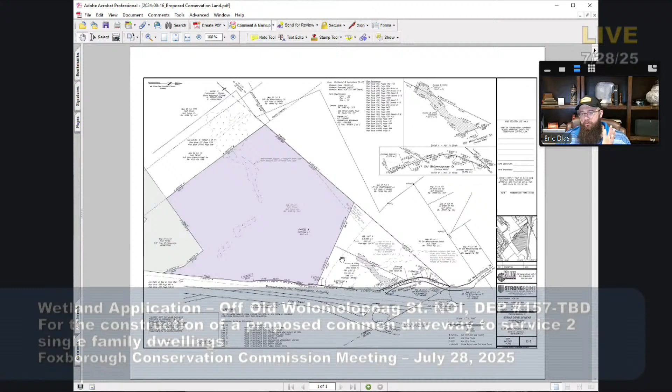The property is about 43 acres in total, bounded by the Foxborough-Sharon town line to the north, the railroad to the south, and Old Wolomolopoag Street, an unimproved way, to the east. There is a subdivision plan in place with the town of Foxborough to develop and improve Old Wolomolopoag Street, as is an agreement with the town of Sharon. The street itself is outside of the wetland resource areas, so that's not a subject of this particular NOI.

What we discussed informally last time is that the plan was to take the total 43 acres and create lot 1, lot 2, and then parcel A in the rear, which is about 32 acres—actually 32.15—and that's the parcel shaded in purple. We'll come back to that in a minute.

So on the site, I'll zoom in on lots 1 and 2. There's a bordering vegetated wetland that spans all of lot 1 and extends a bit into lot 2, and a small intermittent stream that flows out of the wetland toward the railroad track. We discussed that the area on the east side of the resource areas is not conducive to siting homes and septic systems in particular—there's a lot of rock and ledge, it's low-lying, and we don't have the soils needed to site septic systems.

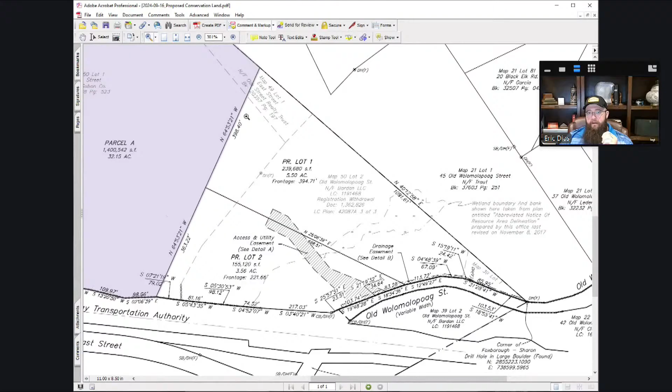So the plan is to cross the resource area at its smallest point, which is the stream, and gain access to the buildable area of proposed lot 1 and lot 2 on the west side of those resource areas. Obviously, the stream crossing requires a waiver from your bylaw, specifically the 25-foot no-disturb zone, and we'll get into the design of the crossing. But the other thing discussed at the time, as mitigation for the proposed crossing...

...was that 32-acre parcel A in the rear. It abuts land owned by the town of Foxborough Conservation Commission on the south side, highlighted in green. So the intention is for the owners to deed this parcel A to the town as mitigation for the proposed crossing and a betterment for the waiver request being requested.

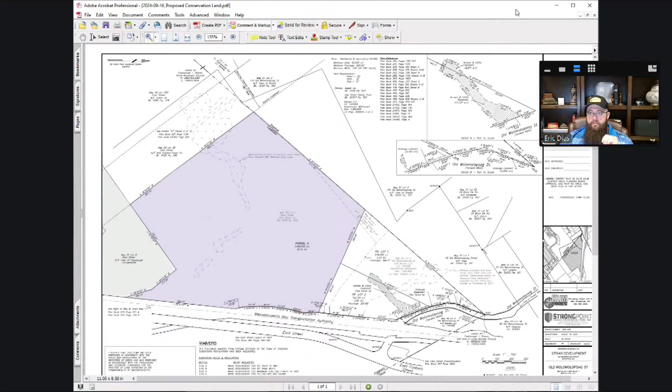So if we go to the notice of intent plan, we can get into some more of the specifics. This is the plan itself that we propose. I'm going to zoom in on the plan view a little bit.

This is Old Wolomolopoag Street shown in its improved form, and this is the proposed crossing we're bringing in. We've kept it to the bare minimum we can. We're proposing an 18-foot wide bituminous driveway, which gives us adequate room for 2 cars to pass, one coming in and one going out, because it will be shared between the 2 lots.

The alternative to sharing this driveway is to do 2 separate driveways, which you can see indicated by this dashed line, showing where a second driveway might have been proposed at the thinnest point of the bordering vegetated wetland. Obviously, that would result in more wetland disturbance, more buffer zone disturbance, and a second waiver being needed, et cetera. So we felt that was not ideal, and we even went as far as already securing the special permit needed for the common driveway with the planning board.

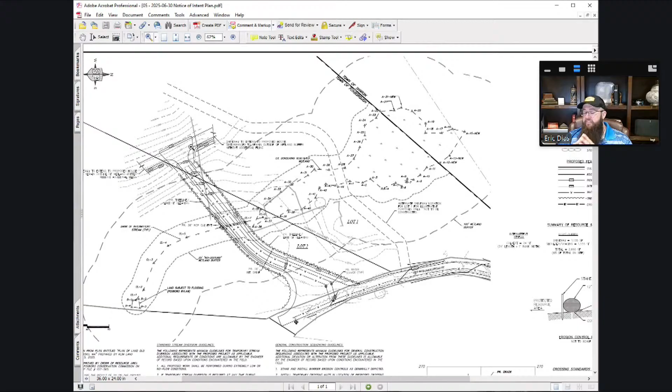The plan right now shows the driveway coming completely out of the 100-foot buffer and then taking a T shape to each lot. The houses are not included in this plan. This land will be sold, and it's intended that the houses will be located outside of the 100-foot buffer, which is why they're not included in this filing. But there is notation on this plan specifically stating that if any further disturbance is ever proposed within the buffer zone, it is required to come back for another filing. That would happen separately, down the road, by another applicant.

The intention now is to gain access, and the proposal to do that, if I zoom in, is to span this stream with a 36-inch culvert. I do have some photos that I'll share in just a moment. The stream in this location is about 1.5 feet wide and about 3 inches deep. I was out there in May when the stream was flowing, and I have photos of that I'll share.

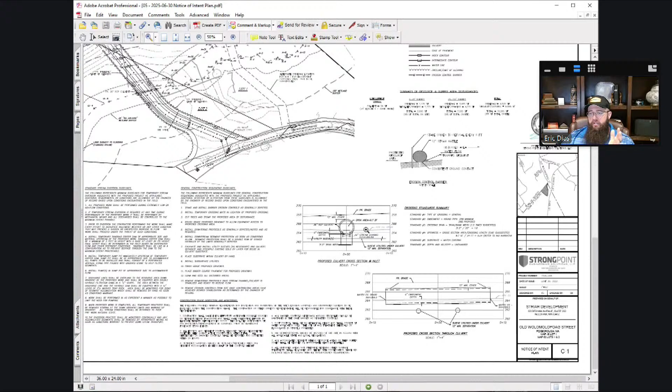So what we've proposed for the crossing is a 36-inch culvert, and we have details here with a breakdown of how it addresses the stream crossing standards. From an embedment perspective in crossing span, we exceed the requirement. For the standard substrate, we're going to match the existing substrate, so that pipe will have any topsoil removed during installation reintroduced. In terms of depth and velocity, the span is such and the grade is not changing, so the depth and velocity of the stream will remain unchanged.

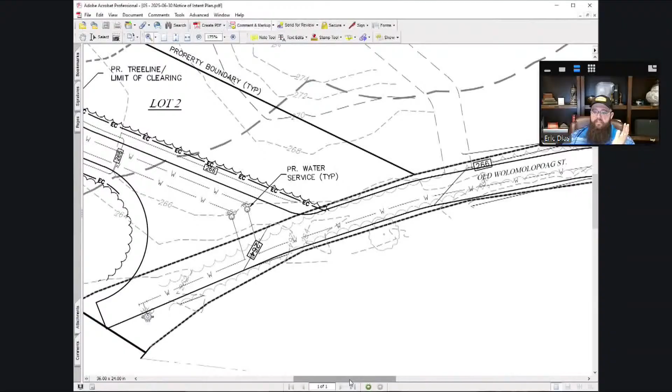The only portion of the crossing standards we're not meeting fully is the openness. The suggested openness ratio is 0.82. To achieve that, we would need a 30 square foot crossing in this location, which, if you do the math, means 6 feet wide and 5 feet tall. That's about a full-scale bridge in this case, which would certainly be a cast open bottom culvert with footings, et cetera, and it's frankly overkill in this location. Beyond being overkill, it would result in more disturbance within the buffer zones, which is why we shied away from that. I don't believe it's the intent of the crossing standards to require such an extravagant crossing that would create a bunch more disturbance in the buffer zone for a stream that looks like this.

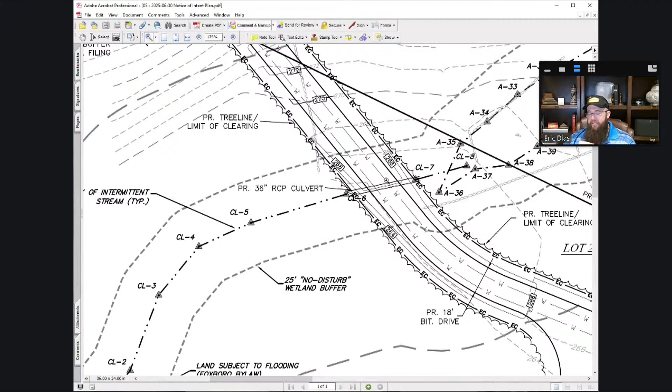Let me stop this share and start another one so I can share some of the photos that I took while we were out there. Just give me a second to bring these up. Okay, so if I go back to sharing, that should be coming up in just a second.

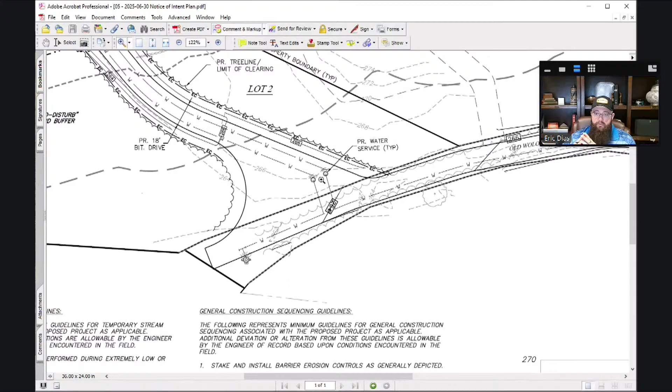One thing, you might want to put a cul-de-sac at the end of the T, just for fire emergencies, so they can get the trucks in and turn around. I think that's a Foxborough requirement, to have a cul-de-sac rather than a straight T.

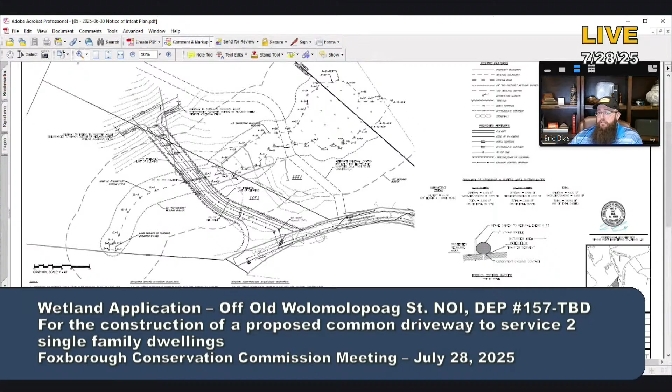Sure, that's definitely something we can address. Even if it was a cul-de-sac or a T, the intention is that the area where the pavement widens would remain outside of the 100-foot buffer zone. Yeah, but it's one of the requirements we usually get from the fire department, so the trucks can get in and out without unnecessary backing. Oh, that's fair, thank you.

Does anybody else have any questions or comments?

If we get this land, how do we get to it? Well, it abuts some we already have, so that's right here. This electric company owns this, Mass Electric. This is Sharon Conservation, this is Foxborough Conservation.

But we can't come in this way. He did go over, I feel we talked about access when he brought it in the first time with the informal discussion. I don't remember exactly what the access was.

I can pull up a map that shows the whole thing if you give me just a second. You would access this parcel, the purple one, through the green one. But I can pull up a map that would show the limits of the green one so we can determine where that access is if you give me just a second.

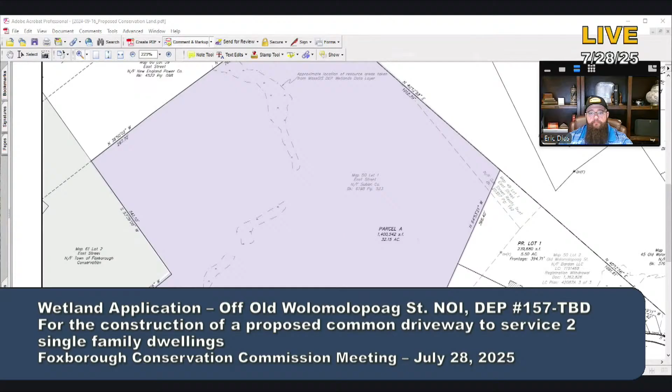Because either you access through here, if you can find that green space on that street, or you come down the power lines.

Okay, so I'm going to stop this share and I want to share another.

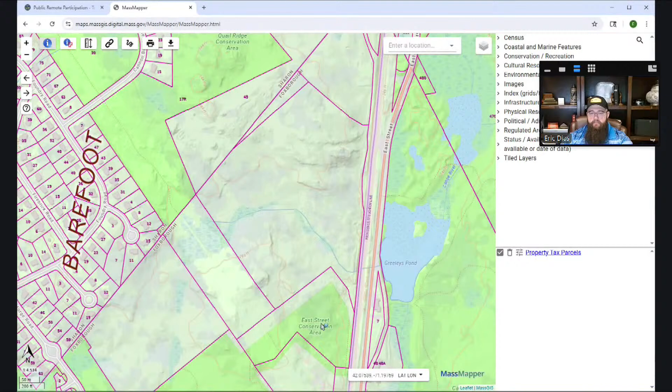So if you can see, this is Mass Mapper. This is the property through here. This is the power line easement, and this is the East Street conservation area that is shaded in green on the plan we just looked at. That connects to the Cannon Forge Estates conservation restriction. So I believe what we talked about last time is that East Street is currently accessed through Cannon Forge, and this would be accessed through East Street. It would really just be an extension of that.

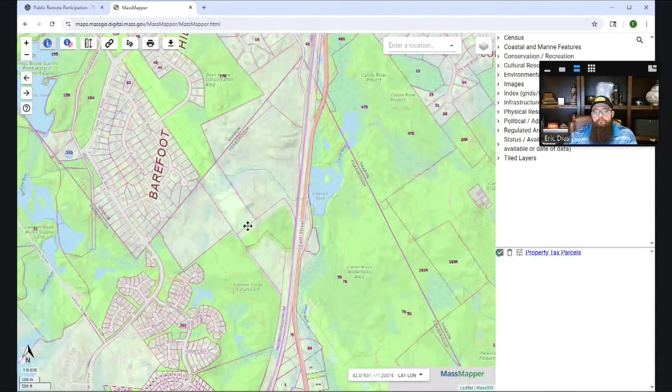Okay, all right. Yep, because I know where the accesses are through Cannon Forge in that area. Walked up many times, yeah. So, all right, thank you.

Do we have developed paths? And then do we have paths, trails? I'm not sure, I've never walked that area. I'm not sure how many trails. I know there's some in the Cannon Forge area, but I'm not sure in this other line.

And we could come down through the power lines from the Sharon Road up there. So it might be a little wet. No, there's a road that goes right there, there's a service road that runs right through here.

Any other questions, comments? Just one question. According to your notice of intent, the flagging was all done in 2017, and I remember we went out there to take a look at it. The question is, has anybody gone out there to confirm if that has expanded or not expanded from the information we put on here?

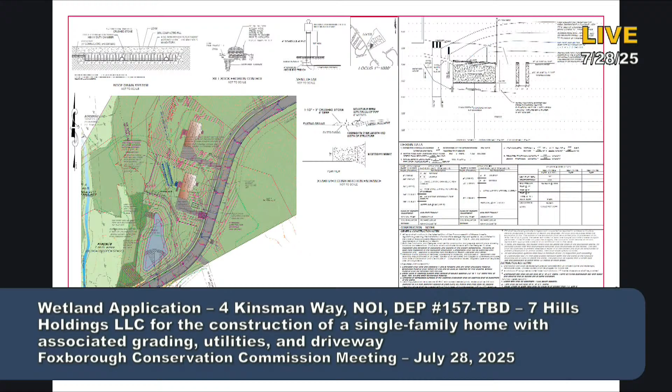Lot 2, the first one on the left, also has some activity in the buffer zone. Starting over here on Lot 2, going down, you can see the red line in this case. Let me zoom in to make it easier for us to look at this. That's much better.

Here's the 100-foot buffer zone line. It goes through and out—this is the buffer zone, as I talked about earlier, from the BVW. For Lot 2, which contains the pond as well as the house, we've kept the septic system outside of it, and it's going to be a fast system, a nitrogen reduction system. This is not a zone 2 in Foxborough, but because it's within 150 feet, the local bylaw requires a nitrogen reduction system. Since it's past 100 feet but less than 150, that's what we have here.

Instead of grading out, what we're trying to do is limit the amount of grading. So we've placed walls along the edge, and we've put the house as close to the roadway as possible. The minimum setback in Foxborough from a street is 35 feet; we've set this house at 36, so we really can't go much further forward than that.

If you look at Lot 4, the next lot over, there's no activity within the 100-foot buffer zone. All of the alteration is in the riverfront area, but there's no buffer zone setback, and in that case the septic system is well outside the 150-foot setback.

On Lot 4, the closest activity is 150 feet from the river—that's the grading in the backyard. For Lot 2, we're 131 feet from the river; the closest activity is 44 feet from the BVW because of this corner here, where we're within 50 feet.

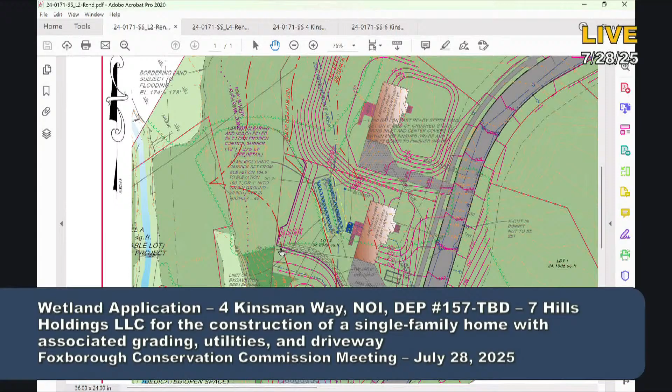The buildings will be served by municipal water. We don't know yet if it will be gas or propane—it's 99% likely to be propane because it's so hard to work with the gas company nowadays that a lot of developers have chosen the propane route. It will be underground, well outside the buffer zone and outside the riverfront area.

So I think I'll stop right there and see if you have any questions.

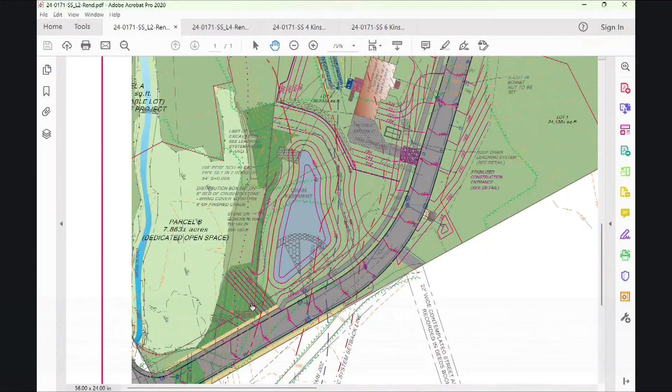Any other questions? So, Bill, this doesn't have anything to do with the two lots, but looking at the catch basins, it seems like a good third, maybe half, of a couple catch basins are not in the road. Is that going to hurt the water getting into the stormwater? That one on the left is a double basin with the grates, but a good portion is not in the roadway - just to capture the water instead of everything going down to the end.

Did you notice there was a lip, a curb? Did you notice Baker put a curb in there? For example, a bad example, Lawson Farms - you know how that hill washed out like crazy? Because what was happening is the roadway is crowned, so water hits the crown and just goes. That's what curbing is for, to get the water into the catch basin. There was no lip there, and it wasn't built up on the edge - sometimes we build it up on the edge. So it just eroded. Baker, learning from that, put in a lip along the edge there, so that will act as curbing to get it into the basin.

There's a tendency not to loam it and seed it and stuff like that until near the end, right? Right, yes. Will that slope be stabilized just with a grass mix, or will there be something more substantial?

It's not really lawn if it's that steep, right? It's all going to be lawn. Everything we're going to do there is lawn. And they might put some landscaping in there, but it's going to be lawn probably.

And these are not custom homes, right now these are just contractor homes. So I might be coming back and say, oh, this guy wants a pool, this guy wants to do this, there's a modification. But as we sit here today, that's the plans. They're going to build these speculative houses in these locations. But it would definitely just be grass.

Is it possible to stake out the location of the trailhead, the piece of land that's going out to the conservation land, up at the cul-de-sac? Yeah.

This is center line entrance? Center line entrance of it? Yeah, sure, sure.

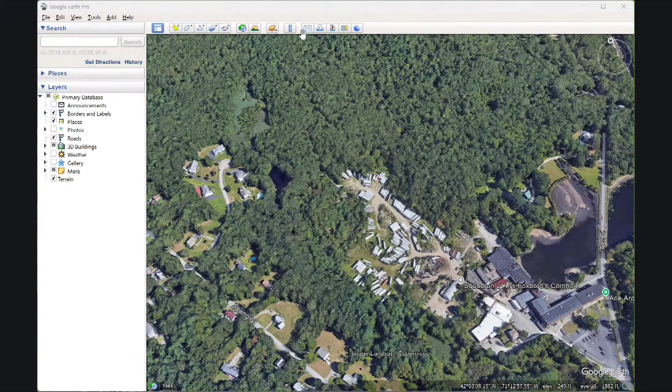So this is the latest one. What year is this? Probably 2025. A bunch of the trailers have been removed. Let's go back a little bit.

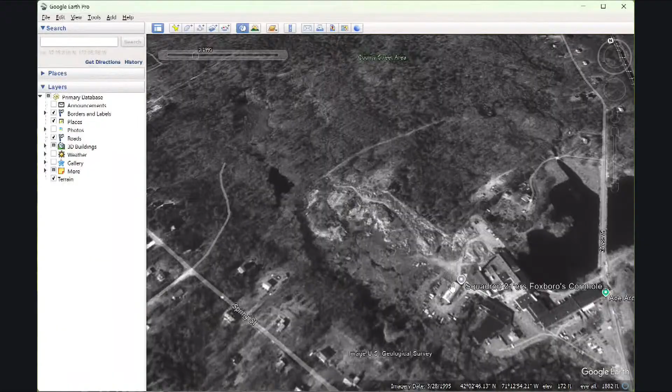If you could just bear with me, I think it's pretty interesting. So here's 95... going to 85, image quality was usually terrible back then. This is the first decent picture, so you can see how the site was gravelled out. This is 20 years after a lot of it was gravelled out, and as we move forward, this is 2001-ish.

This is about when I started getting involved. You can see that all of these trailers were moved in here, and this is an isolated wetland out here, you see it. This is obviously a spring picture; this is a December picture, so it's even worse. This is definitely a wetland out here, and you can see how it goes along the edge. During high water seasons, there's water that actually runs through there.

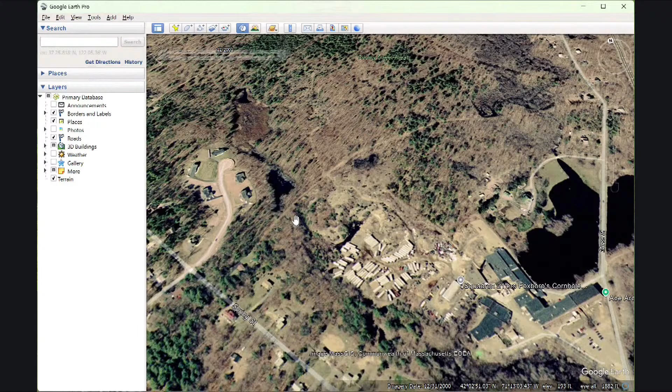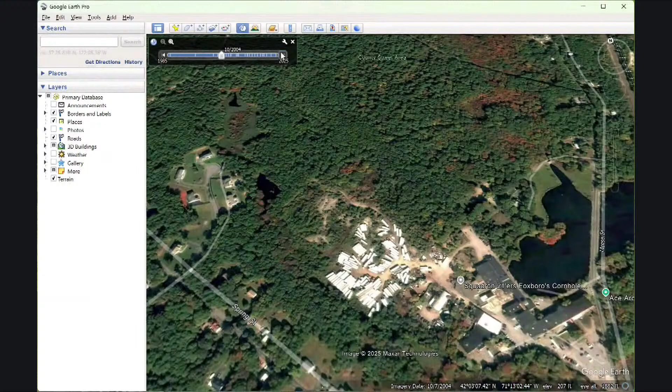This was the point where we started to get involved, and you can see the trailers. The commission stepped in and started issuing orders to the person, saying you're too close to the wetlands, you're altering them, we're not sure what's in these trailers. So an order of conditions was issued, which is the one we were asking you for a certificate on tonight.

As you can see on the plan, which I don't have to put up but you have it, one of the conditions was that in this wetland area out here, they had to plant a line of pine trees and put a meadow berm mix in there.

Trying to keep it 25 feet away, even though the 25-foot buffer doesn't apply to isolated wetlands. He said fine, that's fine, and so that was done. If you go out there today, those were 5-foot arborvitaes. Am I exaggerating? They're 50-foot arborvitaes today.

You could stand out here, out on this edge, and see the tops of them over the trees. So we went out there and located the ones that are still alive. There's still a good number of them that are still alive. The meadow mix, I have no idea—I'm sure they got put down and then went away.

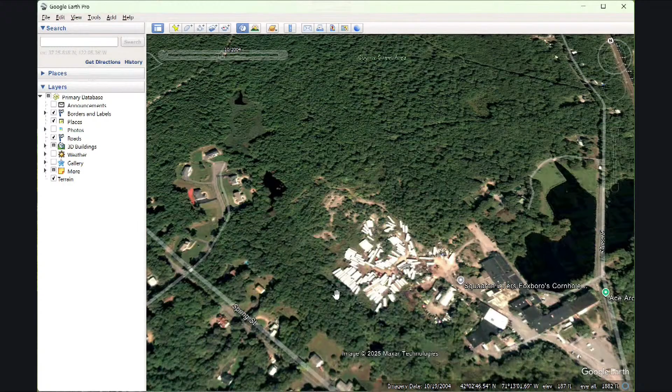And then over here on this edge, which was that little stream I was telling you about, he went in and filled a piece of it. So he was required to open it up, which he did.

And then he just sat on it and never did anything. His daughter and son-in-law own Fine Landscaping, which he sold, or gave, 2 acres of this to them, and they run their landscape business out of it. As you go to the edge of the road, it's right there, not way in the back or anything.

So we did a site walk, as I stated, and I think we did another walk a year or two ago. The discussion was, get rid of the trailers, basically—get rid of the trailers and then we'll consider issuing a certificate of compliance. So I was out there last week, and those trailers? They're gone, every trailer is gone from there. There's one trailer, I think, left, and it's not on the site—it's on the 2 acres that the landscape company owns.

So that's what we issued that for. I told them we would not file for this request until the trailers were removed. The trailers have been removed. Most of those trees are still alive. We showed you the trees that are still there and where they were supposed to be, and the area opened up to the left where they filled in the stream—that was again opened up. This was all probably done 22, 23 years ago, but they never bothered filing for a certificate of compliance. So that's the long story.